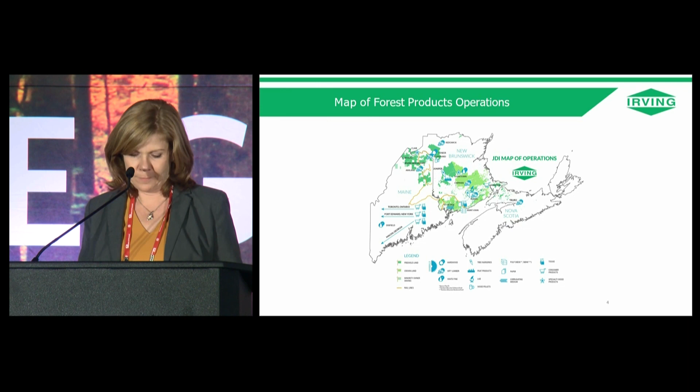So that's a little bit about our company. Thought I'd talk a little bit about our journey, and I don't feel like much of an expert, but we'll certainly share the things that we've done and what we've learned.

We've had automated grading systems in our softwood mills for a long time. In hardwood, our first automated grading system was installed in 2014 at what we call the veneer mill - everybody thinks it's a veneer mill, but it's actually located at the veneer siding. There used to be a rail siding there where we would rail veneer logs, and we put the mill there and the name stuck. So it confuses a lot of people when we say veneer - it's not a veneer mill, it's located at the veneer siding.

We installed that in 2014. I think we were one of the early adopters - we were the second or third to do automated grading in green hardwood lumber.

In 2018, we started our journey with robots. We piloted our first 2-axis robot, which is a robot that will go in 2 directions - up and down and forward and back. We use vacuum grippers to lift an entire layer of lumber at a time.

In 2019, we were feeling more confident, so we did another installation of a bigger system that would do 2-inch spruce. Then in 2020, we did our first 6-axis robot, which means it articulates - it'll move in 6 different directions. That was our first one, small, to pile 2-foot lumber. We learned a lot from that. It wasn't without bumps, but we learned a lot.

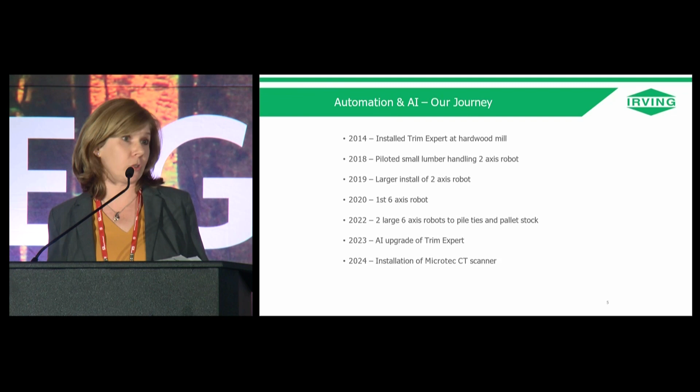In 2022, we installed 2 large 6-axis robots at our hardwood mill that pile all of our ties and our pallet stock. That was a big project for us - to our knowledge, the first of its kind to do that. The challenge we were facing, much like I'm sure many of you, is workforce. That was traditionally where people started, and it became where people sent their kids to try to convince them to go back to school because it's hard labor. It was constant turnover, a lot of injuries were happening there, so it was worth it for us.

It took us about 3 months to really get back up to our pre-installation production. It was not without a learning curve, but now they work great. They work through breaks, they don't complain, they don't have bad days. We're very, very happy that we've done it.

In 2023, just this past June, we did the artificial intelligence AI trim expert upgrade at the system we installed in 2014. Now we're getting ready - and I won't talk much about it because the experts are sitting at the end of the table - but we're getting ready to install the first CT scanner in Canada at our hardwood mill. That's going to go in February of 2024. We're pretty excited, I'm looking forward to hearing a little bit more about that.

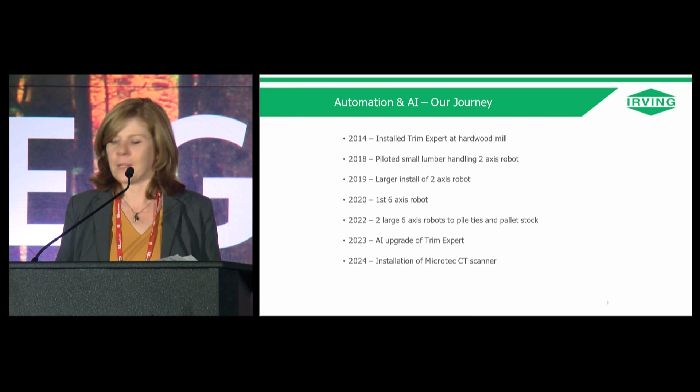So a little bit about our learnings. Computers and robots are 100% repeatable. This can be a very good thing because they do the same thing over and over again. You program it in, you say these are the specs for that grade, and it's going to do it over and over again. But it can be a very bad thing, because if you make a mistake or tell it to do something that doesn't make sense, it will do it over and over and over again. So it can't be hands off. You really need to be watching it and own it, and make sure that you're constantly checking and calibrating that it's doing exactly what you want it to do.

I remember years ago, before we put in any automated grading, second shift was just starting. I was walking through the mill and saw one of the graders, and said, hey Derek, how are you today? And he's like, oh, I'm tired. And I'm just like, you are about to spend the next 10 hours being the only line of defense between us and our customers, and deciding kind of how profitable this shift is, and you're already tired. So certainly from that perspective, having automation takes that variable away.

But you can't eliminate the human element, because to my second point, it's artificial intelligence, they don't have judgment. They don't know what you meant to say. A good operator or a good grader, if you ask them to do something, they'll be like, really? Because if I do that, then this is going to happen. A robot and a computer will just go, okay, and do that. So they'll never replace a good operator and a good skilled person, but they really are there to enhance and increase the flexibility that we just can't do at the speeds we want to go with humans.

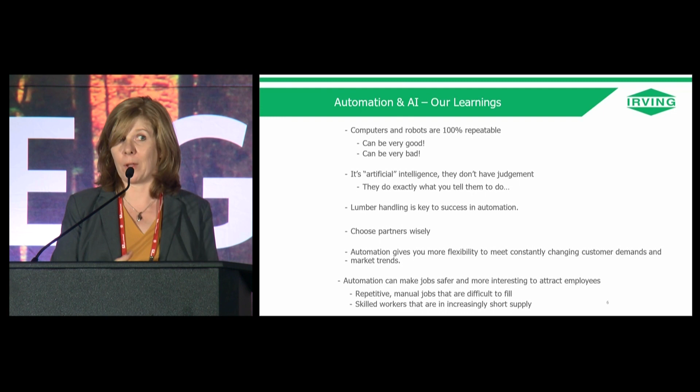And then skilled workers are becoming harder and harder to come by. So with the CT scanner, that was one of the biggest decisions - we're not going to be able to find people like we've had in the past, a Sawyer with 25 years experience. There are no more of those coming. We have Sawyers with 25, 30 years experience, and then we have some pretty new guys. So a big part of our decision is the lack of finding skilled workers, and also the lack of people to do that repetitive type of work. So that's been a bit of our journey and our learnings.

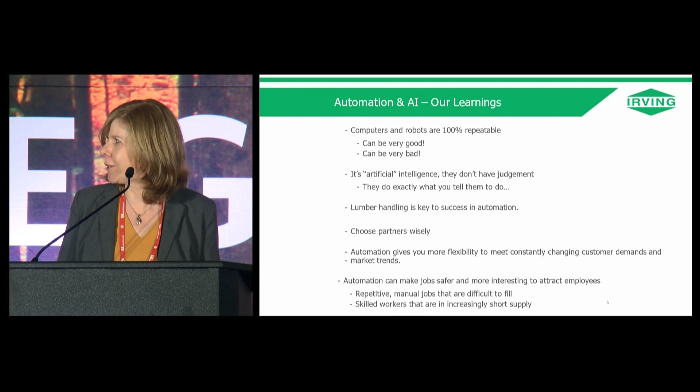And I guess I'm not going to do questions because I'm going to turn it over to you. You're going to do your presentation. All right, well, we'll take questions after. Thank you.

All right, so I'm Josh Green, I'm with Middle Tennessee Lumber. We're primarily a hardwood flooring manufacturer, solid hardwood flooring, mostly white oak. I've got a really exciting presentation about tilt hoist. My choices were pull chain or tilt hoist, and I went with tilt hoist.

Just a little overview of why we're going to talk about a tilt hoist, because it might be the second most boring piece of equipment at our plant. The tilt hoist we have that is in our rough mill, where we're taking things off sticks from our kilns, is roughly 20 years old.

It was installed with a rough mill line that I actually worked on when I was 14 years old. And Mom sent me to work at Middle Tennessee Lumber because she wanted me to go to college and get a real job. So I got an engineering degree and then went and worked in automotive, and that really sucked. And so I came back to Middle Tennessee Lumber. So she basically made me go back to work where I've always worked.

Just checking if this is on. Obviously it is. Rick and I are pinch hitting for our colleague Mike Fitzgerald, who couldn't make it due to a medical issue. So have pity on us, please. We have his notes here, but these are our COO's notes, so they make no sense. So just bear with me.

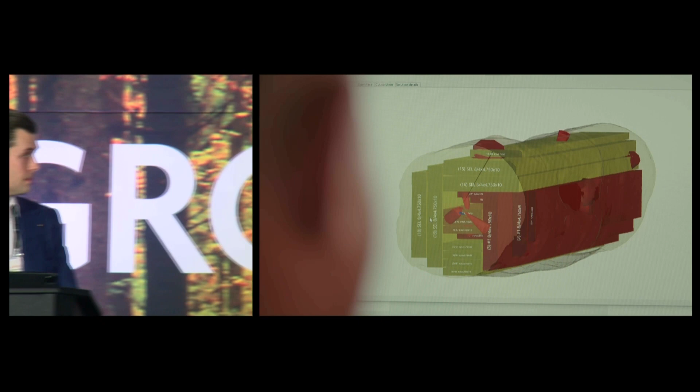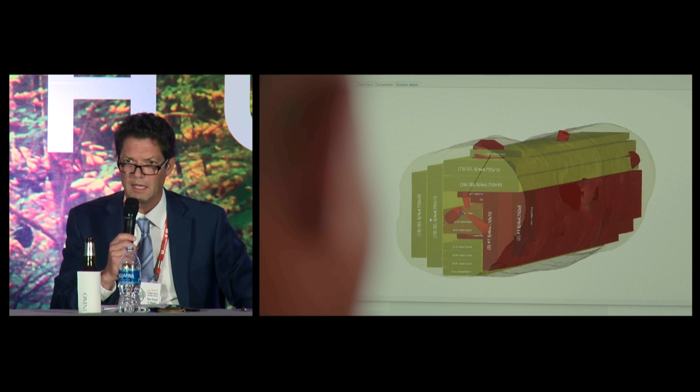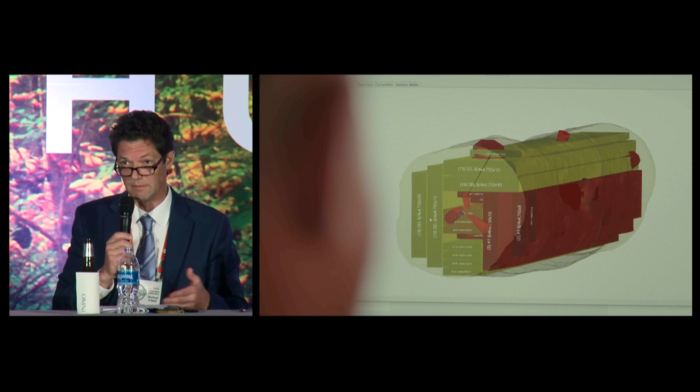About 4 or 5 years ago, I reviewed, or I didn't even know I was reviewing it at the time, but I was looking at our facility and our manufacturing process at Cascade. I was looking at safety and other threats to our business: skilled workers, the ability to get skilled workers, whether they were grading lumber or sawing lumber. It was a threat. They all had gray hair. No one else was coming.

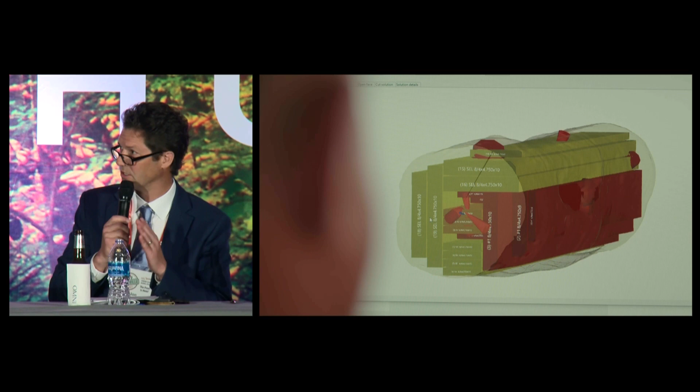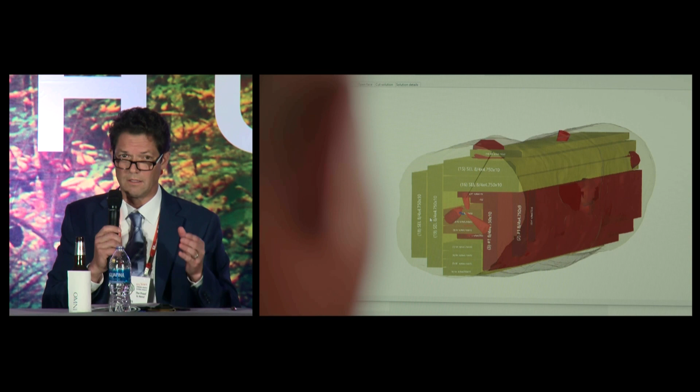Log expense was just constantly increasing. But year over year, my percentages of grades out of my log never changed. And even the diameter of the log was just minor changes. So I had these threats to the business. How can I utilize technology, AI, whatever we're going to call it, to alleviate these stresses on the business?

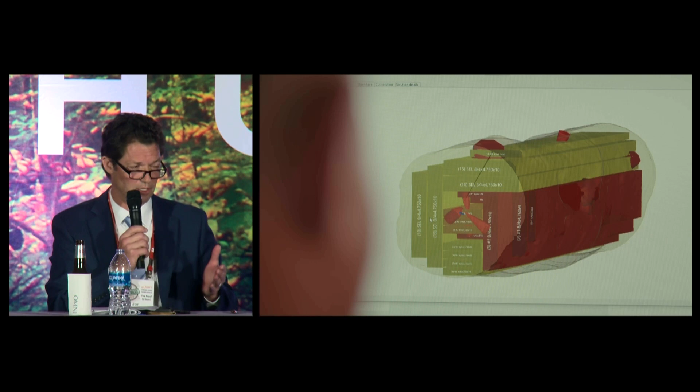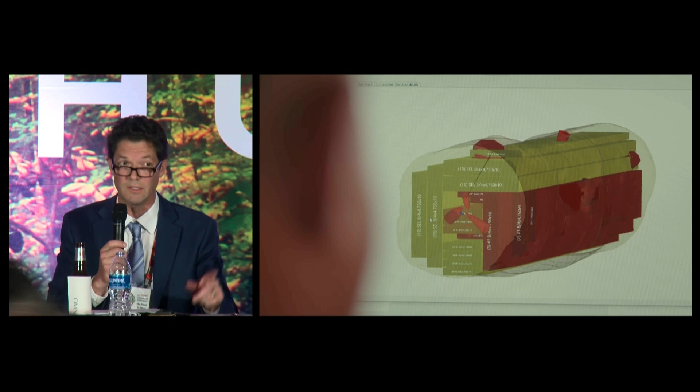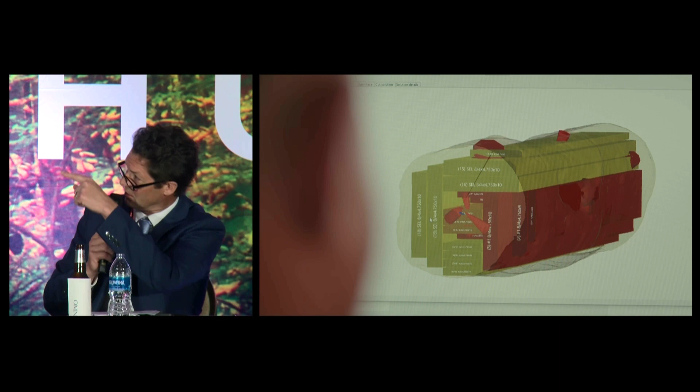And we looked at all the different aspects of the business, and I don't even think we really understood we were looking at it. We were just trying to be innovative. And we did a few small projects. And then about 4 years ago, I was here at the convention in the exhibit hall, and Microtec was here, and I think I went to a panel. And they said that they could see inside the log and tell me how to saw the log. It was black magic, quite candidly.

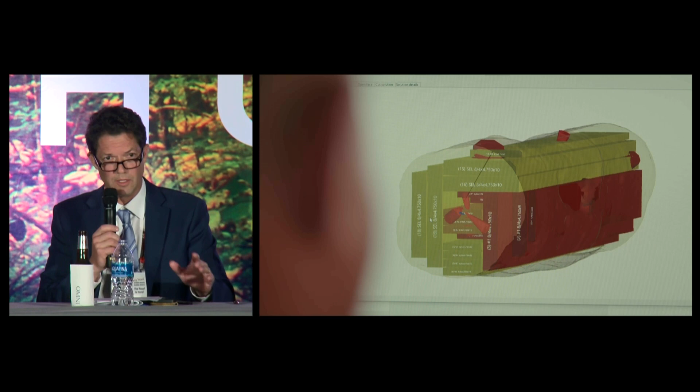So as we looked at the threats, we had to maximize every single log on the carriage. It was too expensive to just run more volume and just get more of the grades we wanted, because then we got the grades we didn't want. And two, I didn't have the log resource to saw that much more volume. All I would do was crank up the log price in our region and blow up the log market. So I had to be smarter with how we consumed the fiber. Move in place, Microtec CT scanning.

The CT scanning technology can detect everything within the log, quite candidly. And it works. Don't really ask me how. That's the COO's job. I'm not the COO.

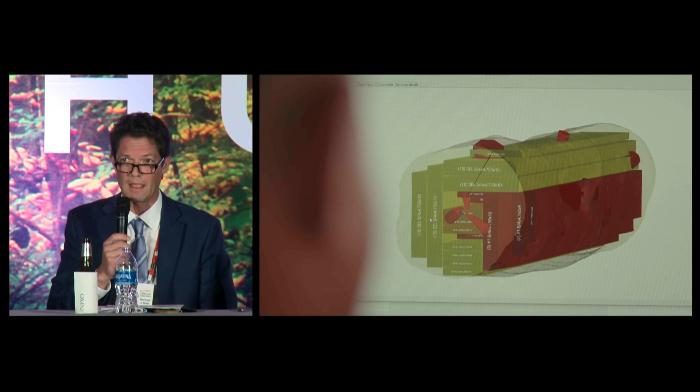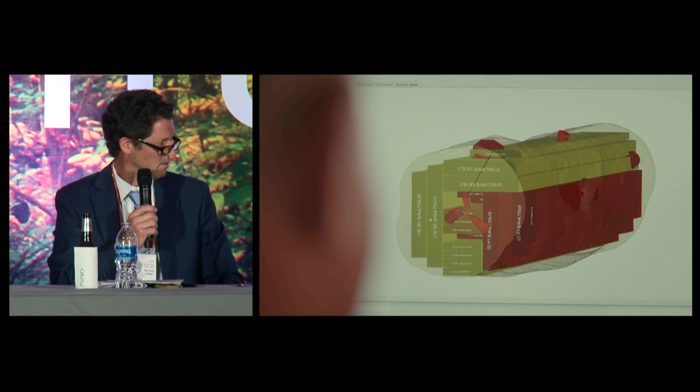The main impact on it was the cost of such an operation is obviously significant. And so we tested it in great detail to see what the increase would be. I'll just go through this testing process quickly. We batched a truckload of logs, and we ran it to a CT scanner in Lewiston, Idaho, which is a several hour drive from our facility. And we ran through and created solutions for all of those segments. And we mapped all those logs, put those logs back on the truck, ran them back up to our facility. And then we knew virtually what they would grade out at.

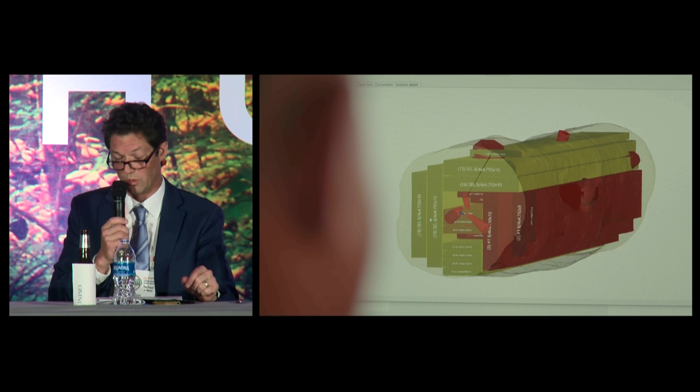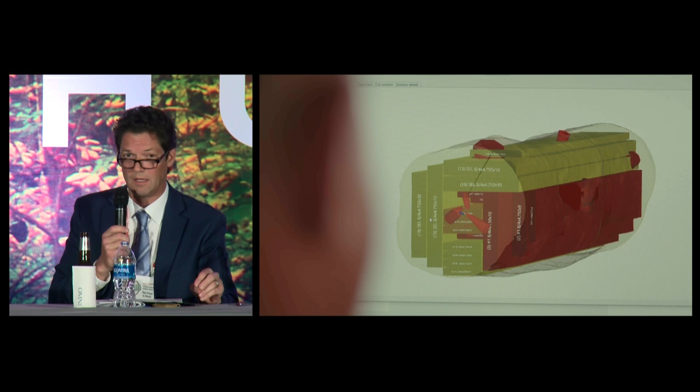That model that's on the screen. Not telling our seasoned sawyer what the solutions were, we ran them in there and then looked at his best effort versus the machine best effort. And there was a significant uptick in that. And we ran a return on investment and said, it's worthwhile doing. So then we embarked on our CT scan install.

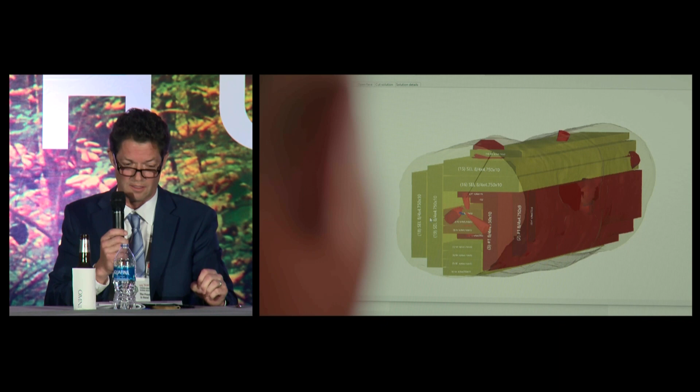Let's see, you want to speak on that part? Or?

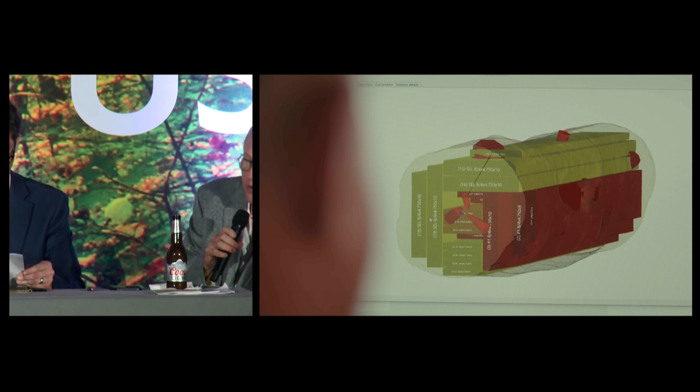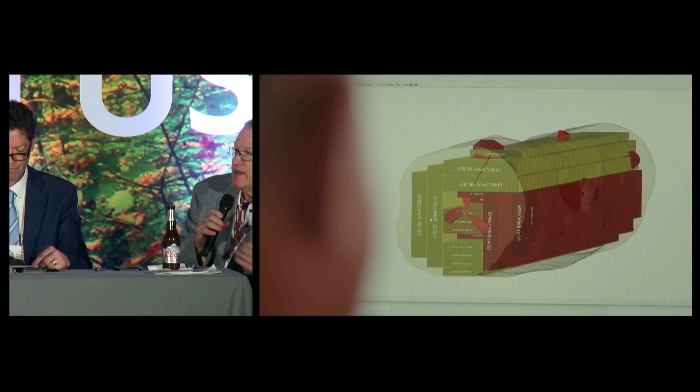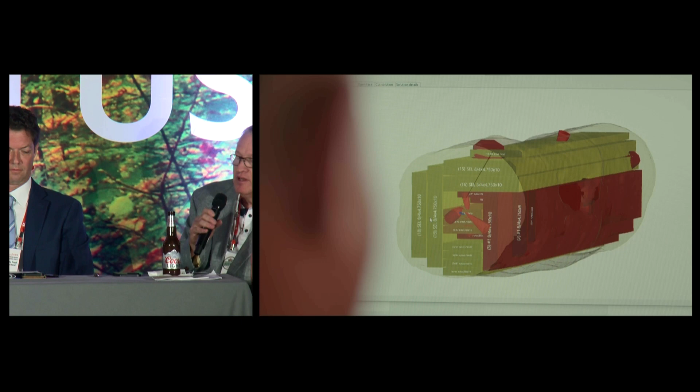So once we made the decision to go, then the fun really started. Cascade is somewhat unique, but very similar to a lot of y'all's other businesses in that we had a lot of 30 and 40-year experienced employees. Convincing them that technology was going to come in and play a role in what we were doing and not take their jobs was a huge part of what we had to do. So we really worked hard to get buy-in from all of the people that are involved. And in the end, it ended up being one of the most satisfying parts of the project.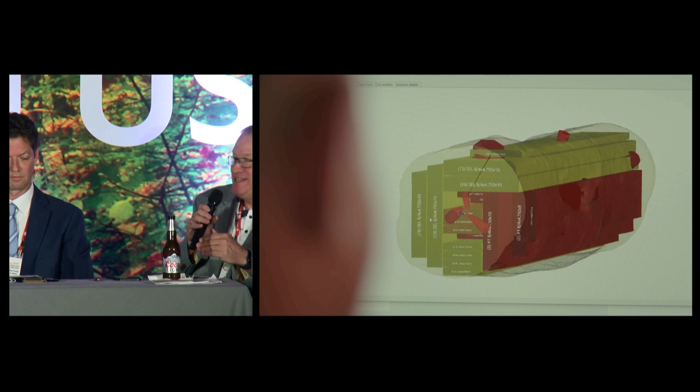The 17-year experienced sawyer that was worried about his job is now the head guy that runs the CT department, and I think all of us need to realize that we uncover talents when we embark on a project like this that we didn't really realize our employees had. We did not know Shelby would be able to take to this the way that he has.

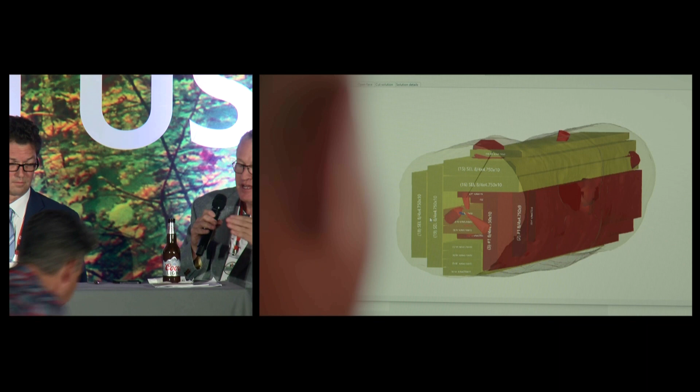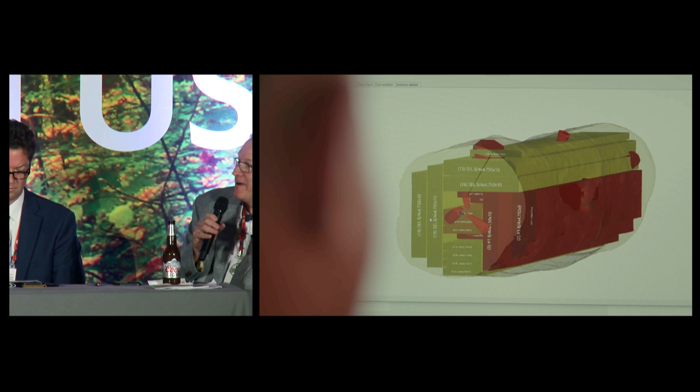Then the other benefit is we've now got 2 younger guys that are in the saw cabs because we're presenting them with solutions at both head rigs, and they're young gamers. They're very good with their hands and their feet and controls. But now that we are able to give them a solution, instead of 5 years, we can take 3 months and make a guy effective in the saw cab. So it's kind of like the same thing we thought about sawyers at one time. Saw filers were never going to go away, and now we've got all the automated filing equipment. We think we'll be able to do grading at some point. We need it to speed up and work laterally for us.

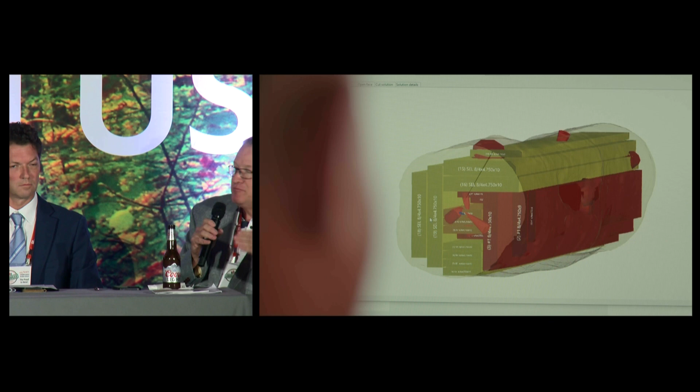But we also chose to do this right when the supply chain issues were so hard. So it took longer than we wanted it to take because our vendor couldn't get parts. Plus, we were all making really good money, and a lot of the softwood guys were really making good money. And so they punted us to the back. It was a little difficult getting vendors and getting contractors lined up to do the project.

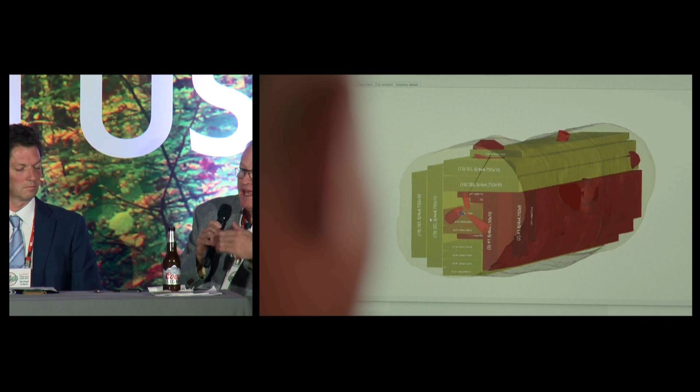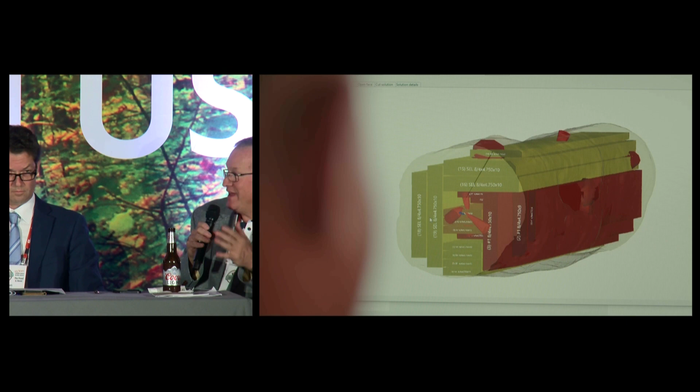But just like any project, we have seen successes. As of late, about every other month, we've been running man versus machine tests. The pitfall right now is we know the uptick that we were getting 4 or 5 months ago. The sawyers have now learned to think like the CT. And so it's masking some of the results, because when we ask them to saw to their best efforts basis and turn the equipment off, they're actually seeing the log in a different manner than they used to see it. And so we have seen a little bit of an erosion in that number, but we don't believe that it's a true erosion. We just think that they've gotten that much better at sawing.

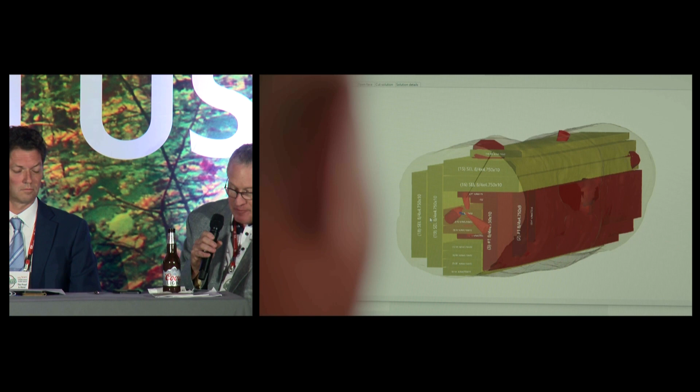Kind of as we look to the rest of this, John, I'm just trying to think what else we want to hit on.

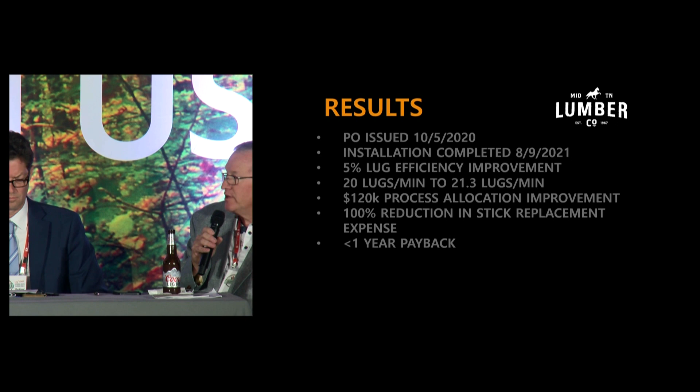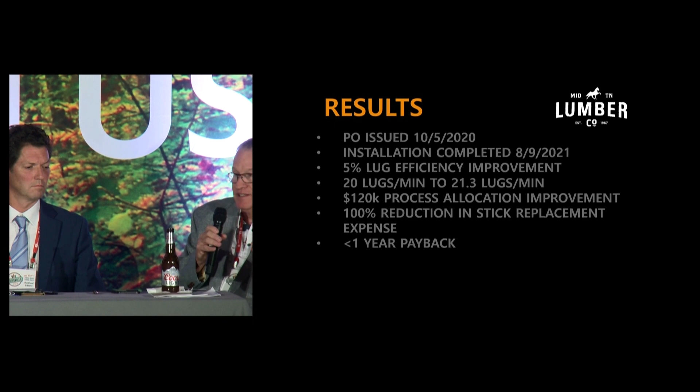But overall, having our own team, in the end, we think that it paid a lot of benefits because we now have buy-in, everything from purchasing to our machinists, to our electricians. They all played a big role in it. We made a big deal of the role that they played. And so now we've got a company that I think we truly have changed the culture from resisting technology to embracing technology. And so one of the benefits of this CT thing is going to be when we do the next step, whatever we choose for that to be, we're going to get a lot of buy-in all the way up and down our company.

Why don't you hit on the close.

On final thoughts, yes, the machine can see inside the log, and it can pull grades, and it can hunt for grades as you change values of grades and thicknesses, etc. To the point where the downside is it might chase after that grade so hard that you get something that you don't want. So you have to be very careful with how much you focus it. Susan, to your point, the machine is only as good as the information that you provide it for the decision that it is making. The one thing that's very critical is don't let sales touch the machine.

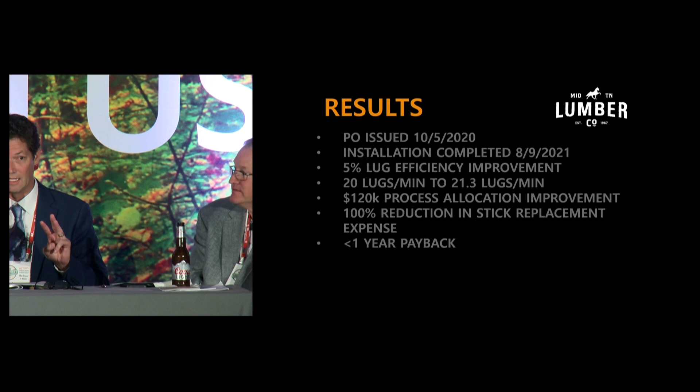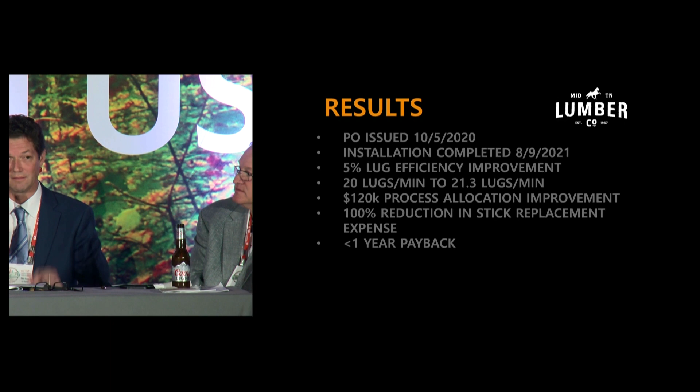Ever. And be careful with how many changes you make to the machine at any given moment, because you don't really know what's going to happen. You need to let it be there, let it run, see what it does. And then on top of that, we have a group of 3 guys, and any change to the machine needs to be all three of their decision together. One person cannot just control the machine. It is a very powerful thing. It will chase after something that you don't want it to chase after. And then all of a sudden, you've got 250,000 feet of something that you don't want. And then the last thing, I'll repeat this, but don't let sales touch the machine.

We had a successful install. We had our pitfalls. There are challenges from it. We are still learning. But as we reviewed our company from a safety point of view and where we were threatened, the SWOT analysis, skilled labor, increasing costs: how can you apply technology to decrease those risks to your company? That analysis is what's important.

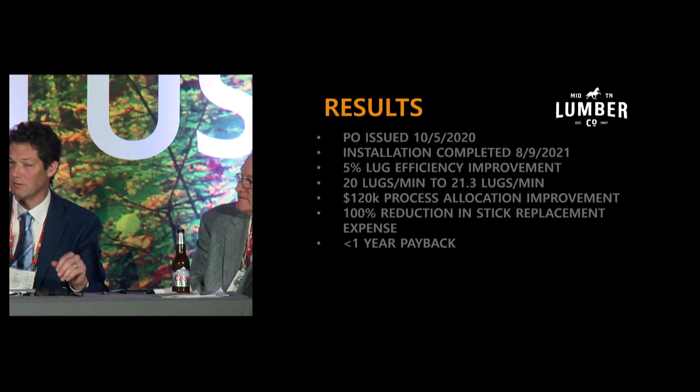It may be something significantly large like a CT scan, or it might be something like we did earlier on, just an off-bearer, taking that person out from the off-bearer position to reduce risk for their health and their safety. Whatever it is, do that analysis of where the low-hanging fruit is so that you can go after the things that have the biggest bang for your dollar. And we found the CT scan was that way. But before that, there were a lot of smaller things. It's not always the biggest, fanciest thing that you want to chase after. Sometimes the ROI on something is dramatically different, and it may be a safety ROI.

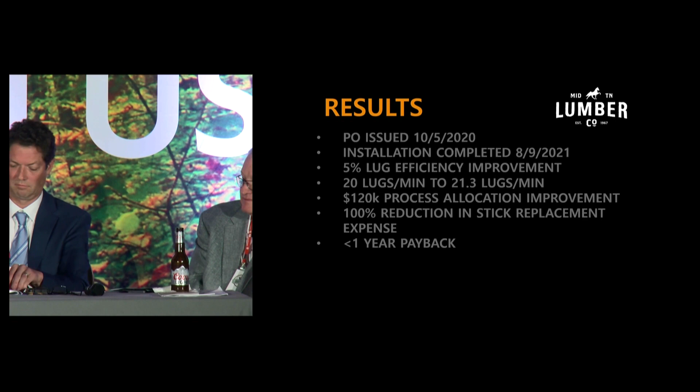I might already know the answer to this question, but in looking at these AI projects, we have two concentration yards. So we've got old tilt hoists, very curious about replacement for that. We also have stackers where we have personnel placing sticks. So my question is, when you're looking at AI, is there an actual reduction of number of people in your mill? Is there a savings there, or is it more?

Is the biggest gain on the efficiency and the safety? We have trouble getting anybody in the door, not just the labor end of it, but really anybody in our environment, especially in New Hampshire. We have a lot of competition for even the skilled workforce. The lumber industry isn't always the first place they want to look for a job.

So I'm just curious whether you collectively think that there's a reduction of personnel just in numbers, or if it's just more of the efficiency and more of the safety factor. Because obviously there is an ROI there. I'm just curious on the personnel part of it. Thank you.

It's an excellent question. And I found that each project was different. Some projects it was a reduction of labor and then moved in efficiency. In some projects, it was simply to move that individual out of an unsafe position. Other places, we reduced our threat to skilled labor, but didn't actually reduce the headcount. CT scan's a great example.

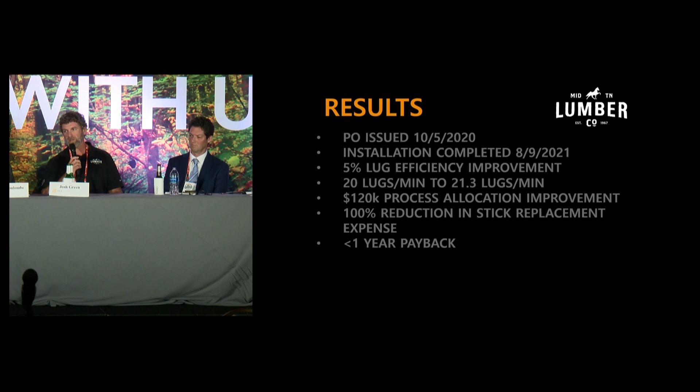The percentage of lumber that we purchase from mills that is ungraded and paying on our grade and tally has just been increasing the entire 12 years I've been there. And so being able to standardize that process and do it quicker is probably, and now if that could tie into another sponsor of NHLA's convention, DMSI software, that would be awesome too, because that's what we use. So if somebody's got that figured out, let me know.

From a management point of view, our company is pretty flat. So we haven't really seen the need to do much in the way of AI in our management services side. I think we're still running DOS.

You like the green. Well, are there any other questions out there for our panelists?

I'm sitting in the audience listening to Rick Barrett speak on operational issues, wondering how far my career can digress. I'll ask this: on the grading application and the log scanning applications, that's about as close as our industry gets to AI right now. With optimization and automation, you start it up, you have a performance guarantee with the vendor, and you reach that point. With AI, you're constantly training and retraining and developing. You've been at it about 2 years now. How close are you to where you want to be? Are you like 70%, 80%? How much continuous training are you doing on your grading systems and your log scanning systems?

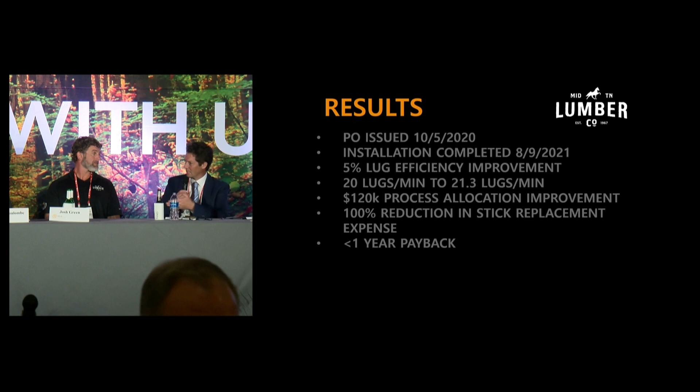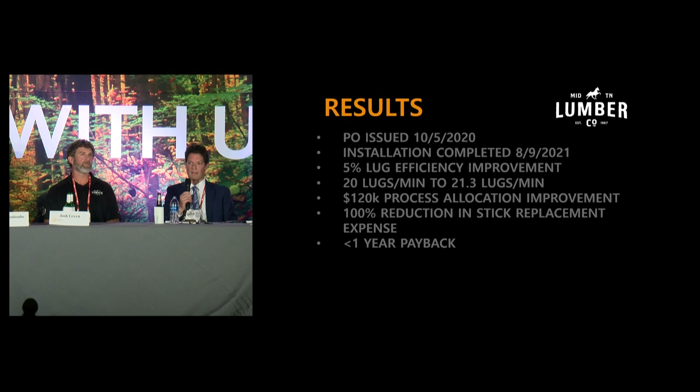I was just curious. I can speak to the log scanning, and Susan, maybe you want to touch the grading. We believe our CT scanner is very accurate at seeing the defect, and it can detect the grade, create the grade, and we'll saw the grade out. We feel we're successful in that. Every single week, it seems like the market changes. Every two weeks, we're modifying which grade we're going to chase after. Alder's a little quicker to dry and produce, so we have that ability. So every two weeks we're modifying what we're doing, revisiting it, looking at it, and maximizing it to the log diameter we see in the log yard.

When you run the CT scanner, every single log, up to however much storage you want to buy, is stored in the computer, in the cloud or wherever. So what you can do is, if you have a 10-inch diameter log coming versus a 9-inch or whatever, you can run virtual simulations and see what percentages you'd gather out of that, and then decide how to apply the values of different grades and diameter logs. So, to your question, are we satisfied with where we're at? My point, even jumbling my words, is that no, I'm not satisfied, because it's constantly changing. Every moment it's changing, so every week we're adapting to a new real environment because the market's changing, the log system is changing. Everything is constantly adapting. What's static is that the machine can see it and produce the grades—it's which ones we're going to chase after, and the width and thickness of them, that's constantly in process. Maybe that gets to it, Bert?